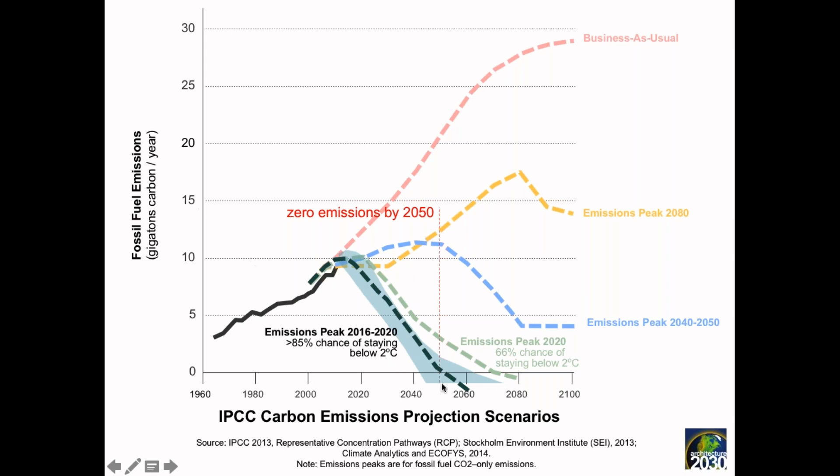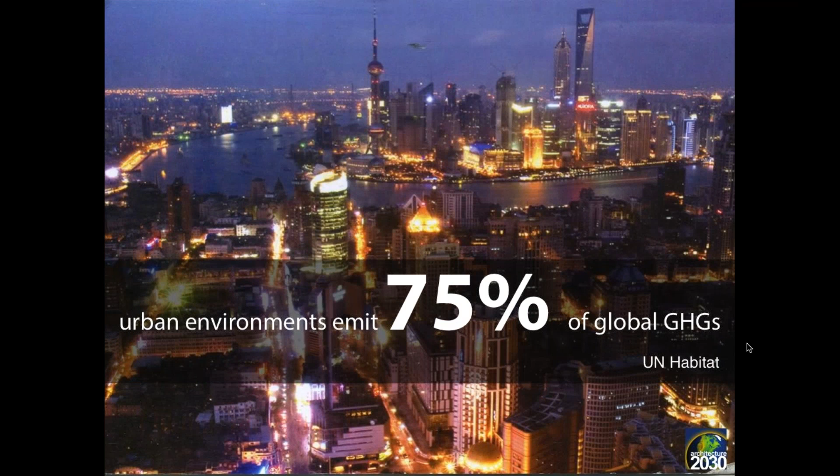Luckily, in the building sector, we have this tremendous opportunity. As most of you are probably aware, the building sector is the single largest contributor of GHGs globally, and urban environments alone represent 75% of all GHG emissions.

And really this is only to 2050 - this is expected for the ongoing future, New York City once a month. So here today, of course, we're talking about embodied carbon. It's important to look at, given those goals and given that new construction growth, what does this look like for our embodied carbon emissions?

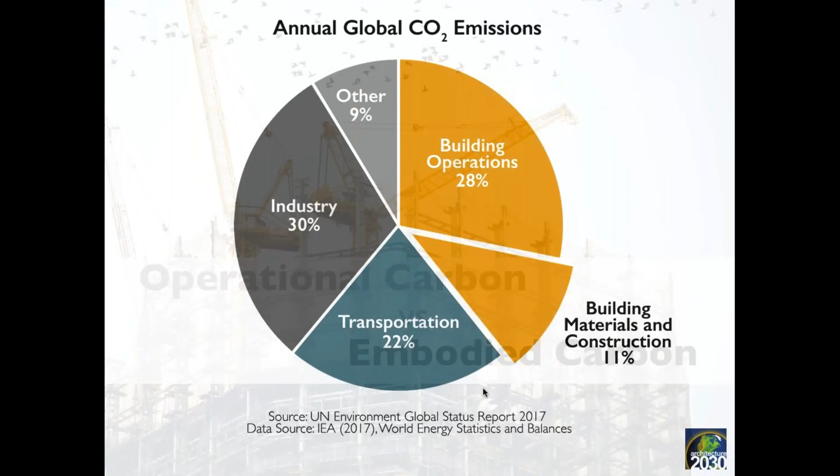On a global scale, on an annual basis, building materials and construction and building operations represent the biggest piece of the global emissions pie, with building materials and construction being responsible for about 11% of total annual global emissions.

And this pie chart is one that we've been looking at in the building sector for a while, and it shows building operations being a bigger chunk of the pie. So a lot of our efforts to date on reducing the impact of the built environment have been on building operations, and that makes sense. But our efforts to reduce building operation emissions are succeeding, not as quickly as they need to, but they are succeeding, whereas we have made almost no impact on our efforts to reduce embodied emissions.

So not on a 1-year-at-a-time basis, but for the whole life of a building, we'll zoom down to just look at one building right now. What do the impacts of embodied versus operational emissions really look like? So again, this is one building.

It's a typical high performance commercial building, an office, roughly meeting today's operational 2030 challenge target, which is a 70% reduction from baseline. So it's pretty high performance, and that comes with some associated embodied carbon penalties, primarily for a higher performance envelope.

So on day one of this building's life, which was constructed in 2015, all of the emissions emitted so far are embodied carbon, and none are operational carbon—obviously, since it's day one. The thing about embodied carbon is that once we put it into the atmosphere, it's there. So the embodied carbon stays through the life of the building.

But we don't even care so much about a 100-year lifespan of a building, because remember, we have that really crucial 2050 deadline. So what if we look at this building profile, but instead of going out 100 years, we draw the line in the sand at 2050, when we need our embodied and operational emissions globally to be zero.

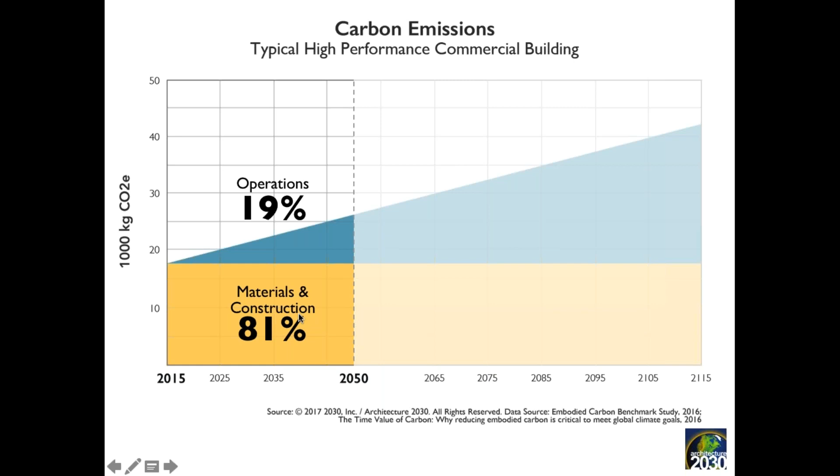So for this building, built in 2015, the breakdown becomes much different, and that materials and construction piece is significantly impactful. And of course, the closer to 2050 we construct a building, the bigger the chunk of emissions will be associated with embodied as opposed to operations.

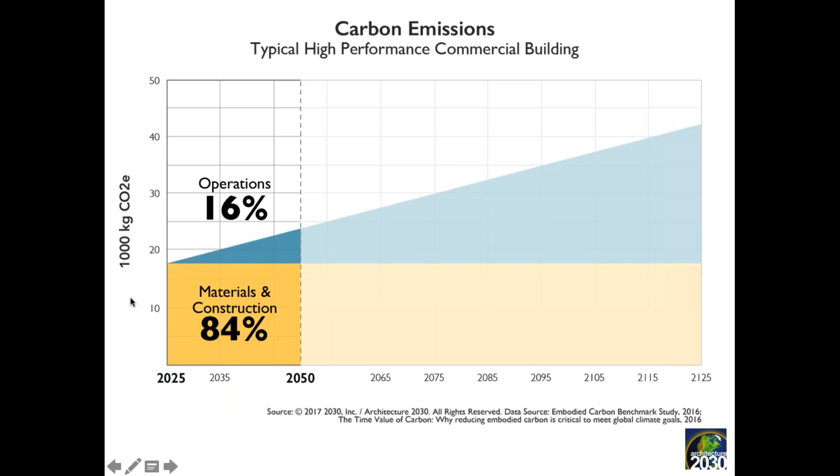So what if we zoom out for a minute from that single building scale and think back to that 2 trillion square feet of new construction that we're expected to build between 2015 and 2050? Again, assuming we draw the line in the sand at 2050, so a building built in 2049 only has 1 year's worth of building operations to show in this pie, what does that 2 trillion square feet of buildings look like in terms of emissions?

So building operations alone are 10% of the pie, which means materials and construction represent 90% of the building sector emissions of this new construction for this time period.

Now, it's important to note that this chart is, in some senses, our worst case scenario chart, but really what the chart is right now is our business as usual chart. This chart is showing that we are making progress on operational emissions reductions, which we are, but as indicative of our trend so far, we have not made a ton of progress on building material emissions.

And so the piece of the pie by the time we get to 2050 that's associated with embodied carbon is pretty significant.

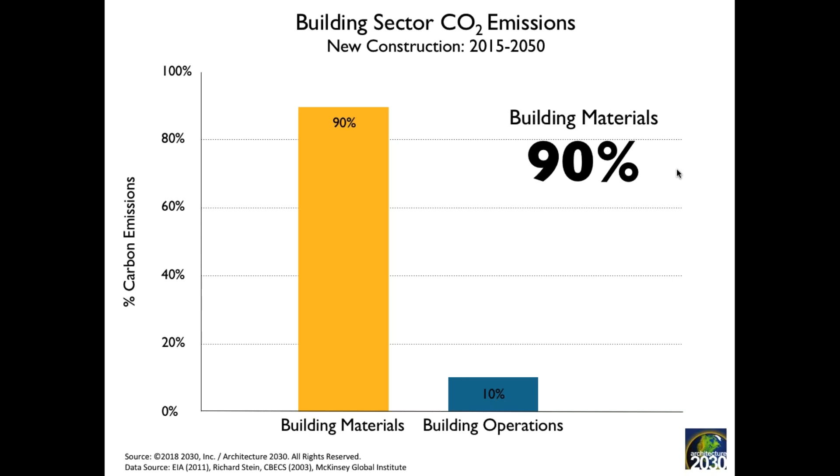So I have some key takeaways from this information that are important for us to think about as we're moving forward and looking at design. The first, just to reiterate, because this is really crucial: we have 32 years to get to zero carbon.

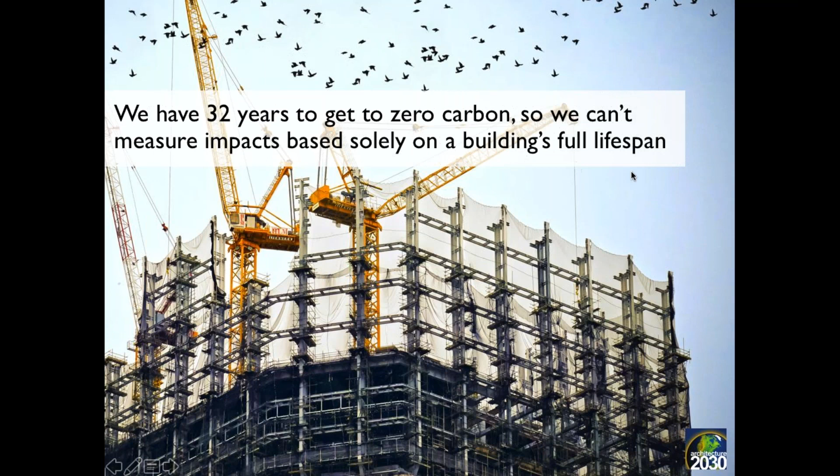So that means we can't measure impacts based solely on a building's full lifespan. When we're doing life cycle analyses, we really need to look both maybe at the building's whole lifespan, but also at what those numbers look like when we draw the line in the sand at 2050.

And then second, relatedly, when setting performance targets, it's really crucial to balance the operational savings, both goals and reality, with associated embodied carbon penalties.

So of course, in an ideal world, we are trying to design for both zero operational emissions and zero embodied carbon emissions. But the way it typically works right now, when we're trying to eke out those last few drops of operational savings, those often come with some pretty high associated embodied carbon penalties.

And it's been our mentality so far to save as much as we can with operations and just keep driving that number down, down, down.

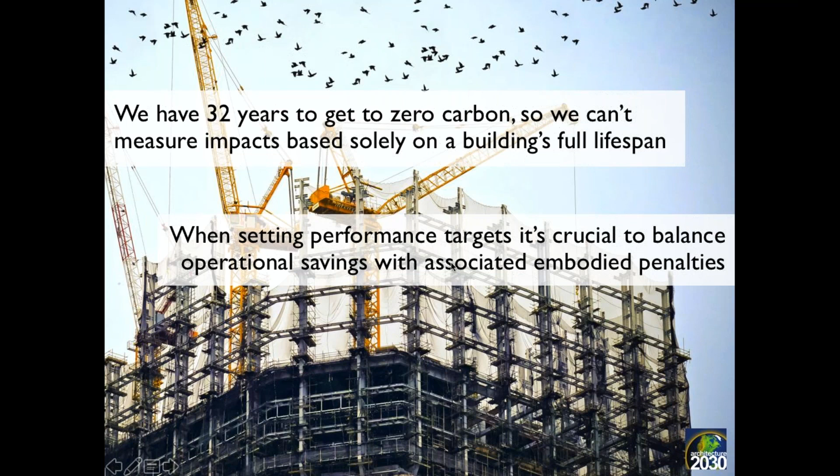But when drawing that line in the sand at 2050, it becomes more important to think: okay, is the extra embodied carbon that I'm going to emit to eke out that last 1 EUI reduction in operational savings—carbon that's going up today and will be in the atmosphere—is that really worth it?

And so to that end, I'll just do a quick introduction to this new initiative that Architecture 2030 is working on right now. It's kind of coming, and some folks on this call are even probably helping support us on this. So this is something you guys should keep your eyes out for.

We are working with the Carbon Leadership Forum on an initiative called the Carbon Smart Materials Palette. And so we're trying to address a couple of problems with this. As we know, this just pulls out the building sector pieces of that larger pie.

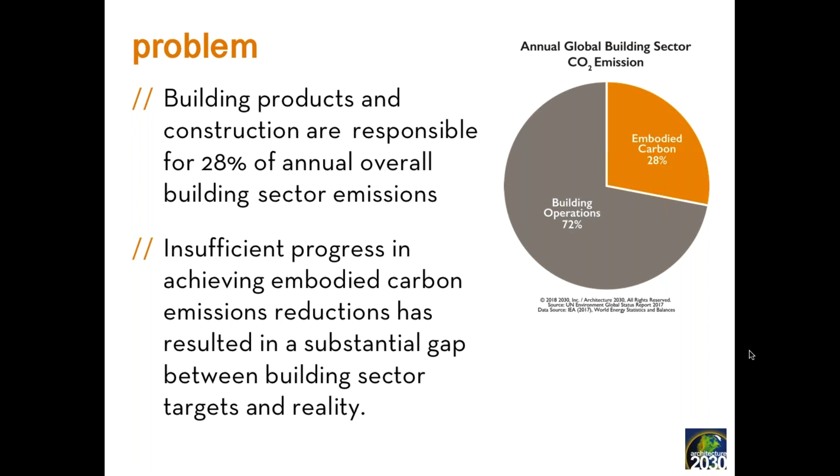When you look at just the building sector, operations right now are about 72% of annual global emissions, whereas embodied carbon is about 28%. But we have made really insufficient progress in achieving our embodied carbon emissions reductions, and that's resulted in a substantial gap in our progress towards meeting that zero by 2050 goal.

The Carbon Smart Materials Palette is intended to support immediate action for making impactful embodied carbon reductions. We do this by providing a set of attributes and design guidelines, as opposed to data-based information that you might find on an EPD. The palette will have swatches for each of the highest impact products and systems—concrete, steel, aluminum, finishes, etc.—as well as complementary swatches for naturally low and no carbon alternatives that can be used in general or in lieu of these high impact products and systems.

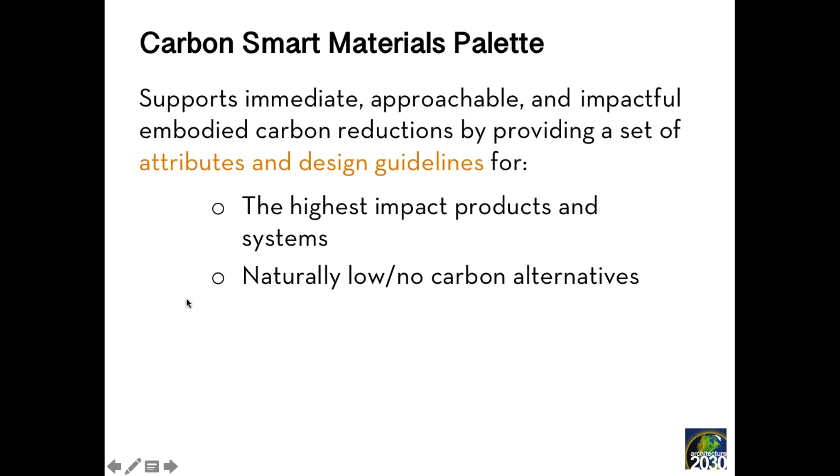This is coming, and the Carbon Smart Materials Palette will really be a whole toolkit set targeting all audiences that are going to be crucial in driving our embodied carbon emissions down to zero. The palette itself will be a free online platform, primarily for designers within the design community. The attributes will then be developed into model specifications, again for designers, but also for contractors and suppliers.

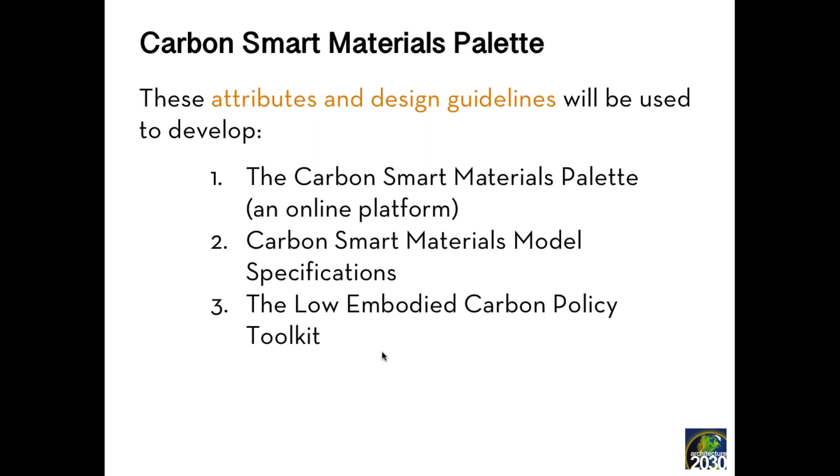Finally, the attributes in the specification language will be developed into a low embodied carbon policy toolkit to support us in our activism, and to support legislators in successfully implementing legislation such as Buy Clean Washington, Buy Clean California, and other embodied carbon bills coming down the line. So that's my quick update on what Architecture 2030 is doing.

If anyone has any questions about the palette, or any interest in participating in helping us develop those attributes and answering other questions about these materials, feel free to reach out to me. Thank you.

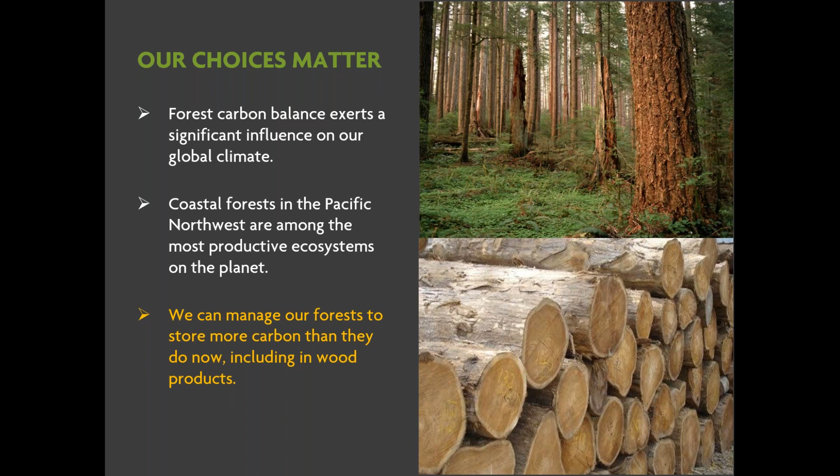So the way we originally got pulled into this was several years ago, we contributed to this study of the Bullitt Center. It sounds like some of you may already be familiar with it, so there's a little blurb for more background. We were asked to do an ecosystem service assessment of the footprint beyond carbon that went into the construction and operations of that building.

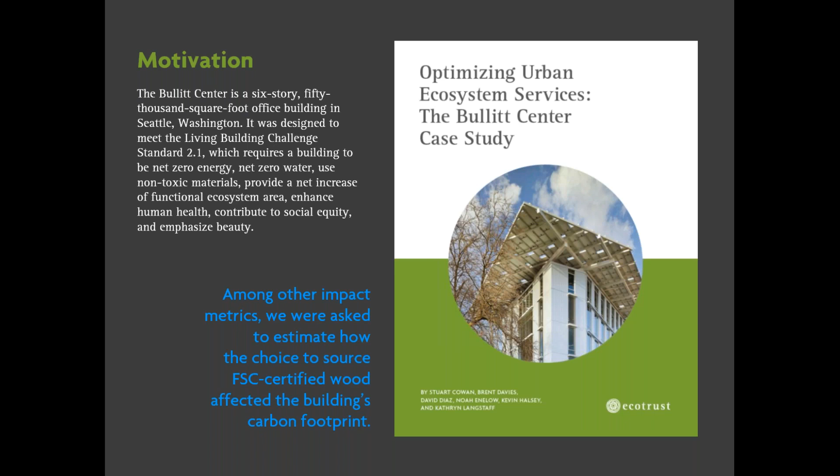One area I really focused on was that the Bullitt Center sourced its wood from FSC certified forests. We were asked to quantify what kind of difference that made in terms of the carbon benefit the building would provide. This is separate from something like wood product substitution for non-wood products. It's just about how the fact that the forest was managed to FSC specs changes the embedded carbon benefit associated with that wood, relative to buying uncertified wood.

The basic idea is that FSC represents something of a middle path between managing for timber extraction and recognizing that there are conservation values we as a society want reflected in how our forests are managed. FSC certification is one of the certification options available, and it's the only one that actually requires you to go above and beyond state regulations in terms of adopting particular management systems or conserving additional forest attributes.

So we developed a study focused on two key requirements for FSC certification. One is green tree retention, which refers to how many trees you leave whenever you do a harvest. The other is riparian management zones, or how intensely you can manage next to streams. Usually those practices are restricted by states with Forest Practice Act regulations, to prevent sediment from getting into streams, protect fish habitat, and protect drinking water supplies. FSC requires management to go above and beyond state regulations in both categories.

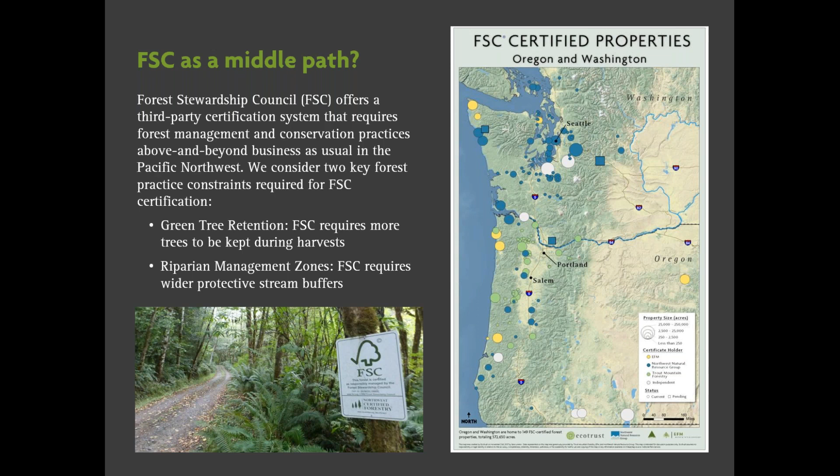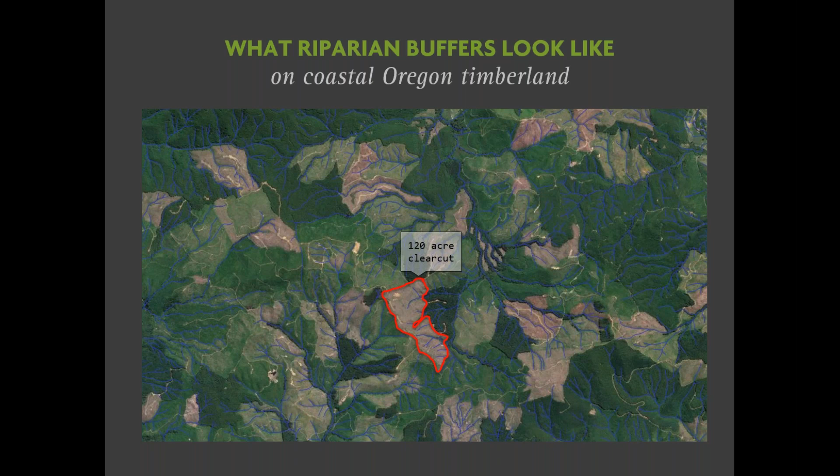I'll give you a sense of what some of these look like on the ground. This is an overhead view of a coastal Oregon watershed that's been pretty intensively managed. For scale, you've got this 120-acre clear cut implemented over the past several years, and you can see some of the streams across the landscape. This shows the regulatory stream buffers that would be implemented under Oregon state law. You can see it changes depending on the type of stream - on the main stem here we have wider stream buffers than elsewhere.

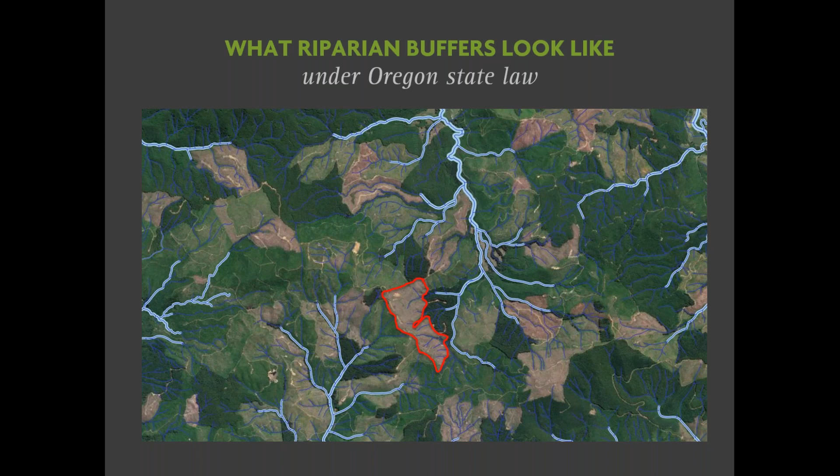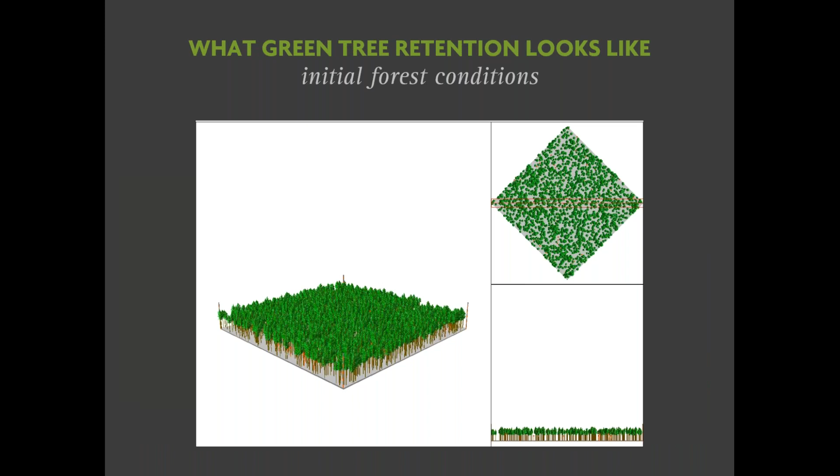The other aspect we're looking at is green tree retention. If we start with a forest that looks like this, there's a few different ways you could implement a harvest. On the left, this is showing a 10-acre area and what it would look like if you were harvesting under forest practice rules - this requires you to retain 4 trees per acre, actually 2 standing trees and 2 downed trees. We're trying to be a bit more conservative here, assuming more conservation than is likely to actually be happening under state forest practices.

But under FSC, the most intense harvest you can get is this 10% - you have to leave at least 10% of the basal area, which is the cross section of the trees across the landscape, retained in a harvest. So in general within FSC, we would expect landowners, if they are implementing harvest, to range between this 10% and 30%.

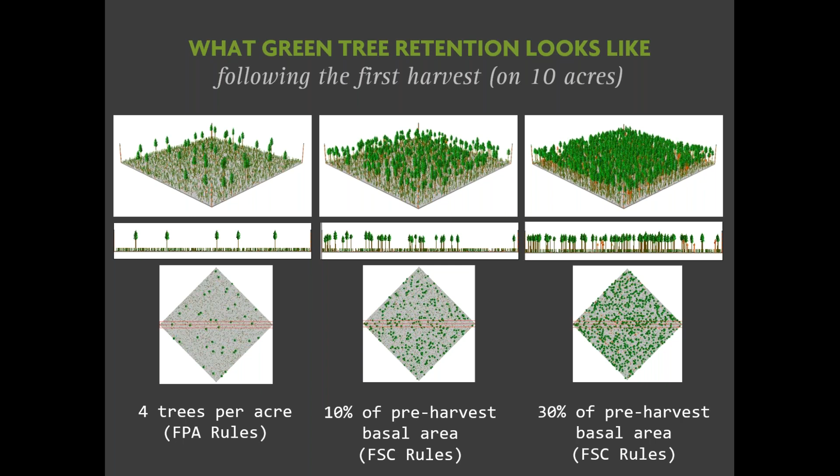And as you can see, it's a lot more trees that you're leaving behind. So we wanted to evaluate what that impact would look like over time. We selected a bunch of different properties all across Western Oregon and Washington.

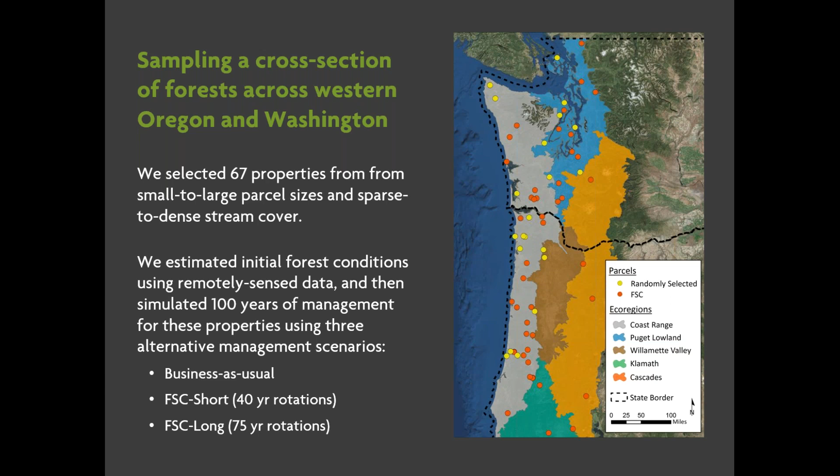We selected them intentionally to try to cover large properties and small properties, properties with lots of stream cover and no stream cover. Then we simulate 100 years of management, and we do 3 different scenarios: one that's business as usual, which is a short rotation of about 40 years with minimum retention requirements and minimum riparian buffers under state law. Then we simulate 2 FSC type scenarios where we're going to be following the green tree retention and riparian protections that FSC requires.

This is a glimpse of a paper we're preparing to submit for peer review at the end of this month. Some of these numbers are still in flux, but one key takeaway was that when we look at tree carbon, leaving more trees on the landscape gives you this step function over time, where under business as usual, the amount of carbon stays flat, but under FSC, you start stepping up over time.

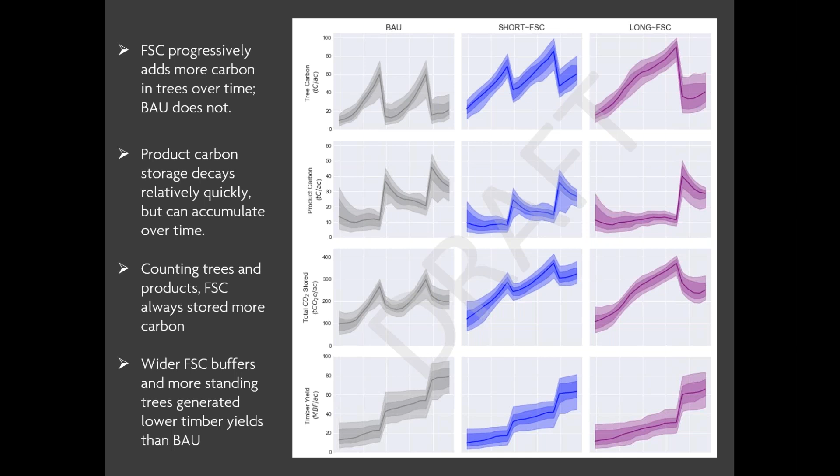Carbon storage in products decays after it's harvested, so that's a really important aspect of carbon accounting in forest management - you recognize that wood products carbon is not a permanent sink. We generally found that FSC always stored more carbon than business as usual did, and there's a trade-off with how much timber you're pulling off the landscape as well.

So when we try to boil that down into what's the embedded carbon number - if you were to buy 1,000 board feet of logs from an FSC certified forest, what's the difference in terms of how much carbon is stored there? For what it's worth, we're trying to make very conservative assumptions that err on the side of assuming there's more conservation under business as usual than is likely to be the case. So these numbers are intended to be the minimum estimate of the FSC carbon benefit.

What we found was that per 1,000 board feet of logs, the numbers were different in Oregon versus Washington. Washington has a variety of stricter forest conservation practices than Oregon does. So adopting FSC in Oregon would correspond to about a 1.9 ton CO2 difference per 1,000 board feet of logs bought from an FSC forest versus business as usual. In Washington it's a little bit lower, but both are substantial improvements over business as usual in terms of how much carbon is embedded in the wood you're buying.

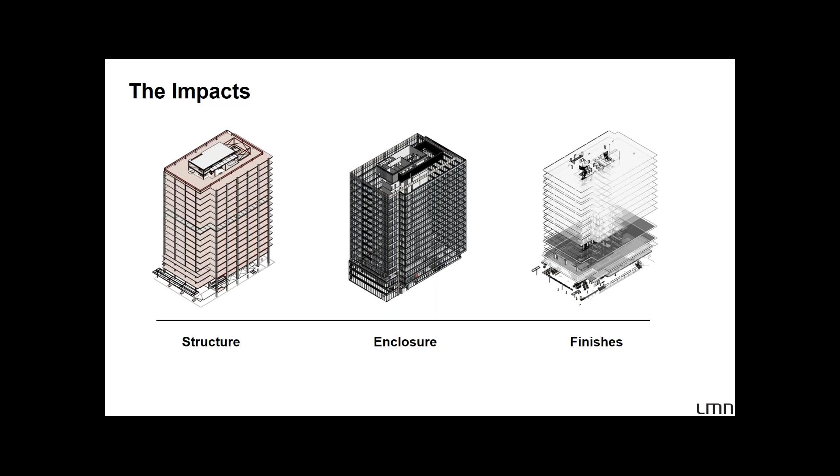So typically, what you'll find for embodied carbon is that the structure is almost always the biggest impact. Enclosure usually follows behind that, and then typically finishes behind enclosure. So there's sort of this downward trend.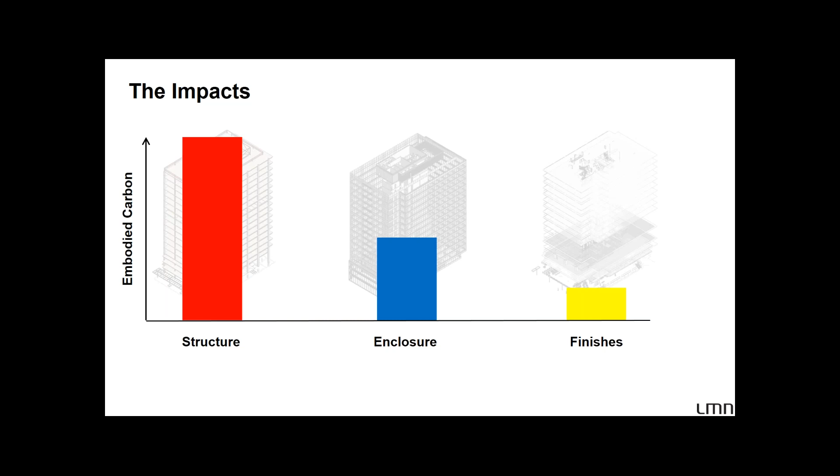So certainly the most important thing that architects, engineers, designers could focus on would be the structure. However, there's a really unique opportunity for architects in particular to focus on the enclosure because it's just really easy for us to do, and we design enclosures and facades all the time, and it oftentimes does not have a lot of cross-discipline coordination, or it's something that's mostly in the architect's hands to do.

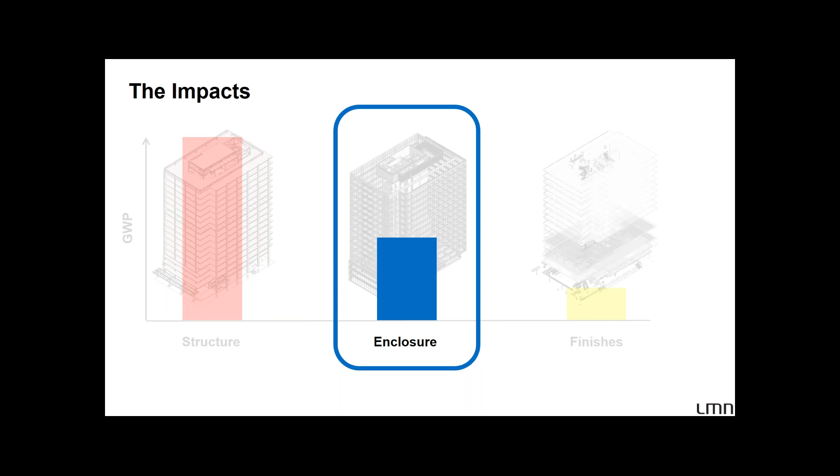So it's a huge opportunity to take that relatively high impact of the full building and try to make some reductions on it. So again, it's something that architects do every day.

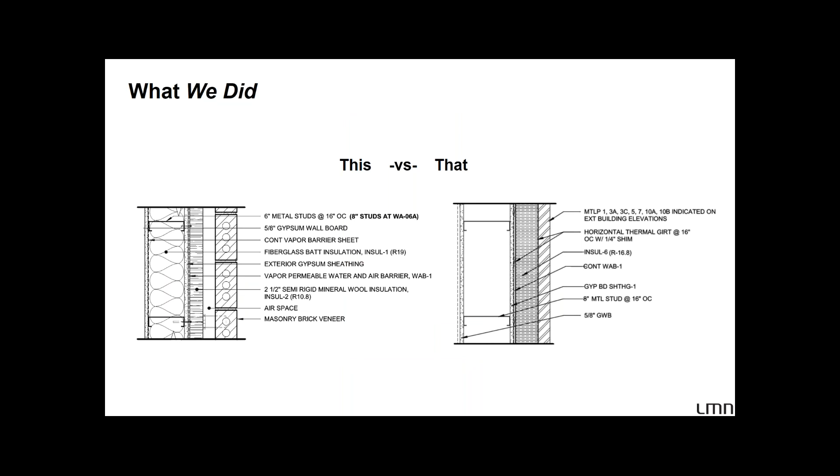It's this versus that. What are we going to clad this with? How are we going to insulate it? What's going to be the framing? And for each of these different materials, trying to develop an LCA sort of intuition as you're designing and making decisions like this as an architect, so that you can make less impactful buildings in the future.

So what we did, again, this was one of the first sort of studies we did a while back, just to kind of get a sampling of some of the stuff that we've already done. So we took 10 of our projects. Some of them were built, or under construction, or under design.

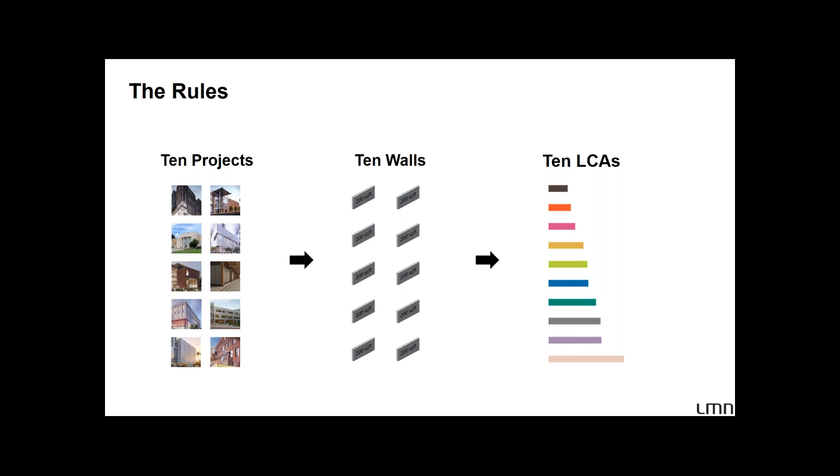We took a single wall type from each of those, an opaque wall, and just said let's compare those and see where they stand. Let's just do a benchmark and see how those different walls compare against each other. And like I said, there were a lot of different types, different geographic regions, different functions.

But the important thing was that we were doing our own buildings and making it relevant to our own firm. This information that we were looking at was going to be able to be brought back to those teams to try to make a sort of an office-wide understanding of embodied carbon.

One thing we had to look at was, well, what are we going to measure? Typically the TRACI impacts, and specifically the ones used for LEED V4, were what we chose to record for this study. And then, how are we actually going to compare these?

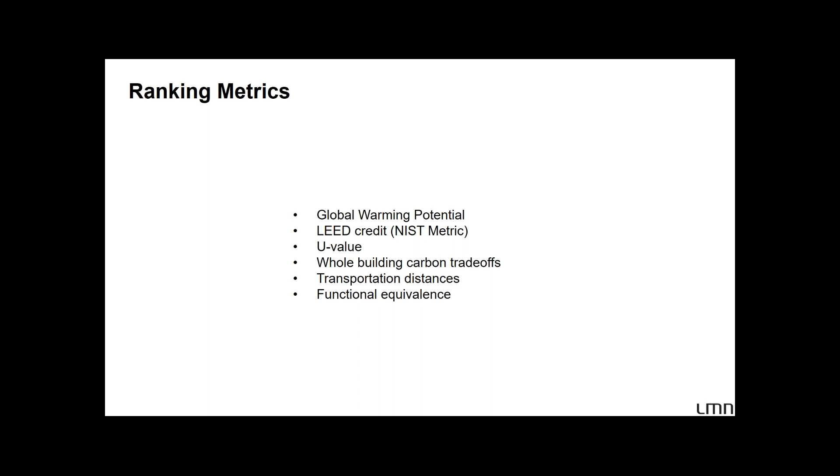So there's a lot of different ways we could do that, and I guess I won't get into all of them, but the point here is that we chose to just eliminate the scoring, or sort of the ranking or comparison of these, and just look at the embodied carbon. We're still going to measure everything else, but for this one study, let's at least compare them in one consistent way and eliminate the variables to make it as straightforward as possible.

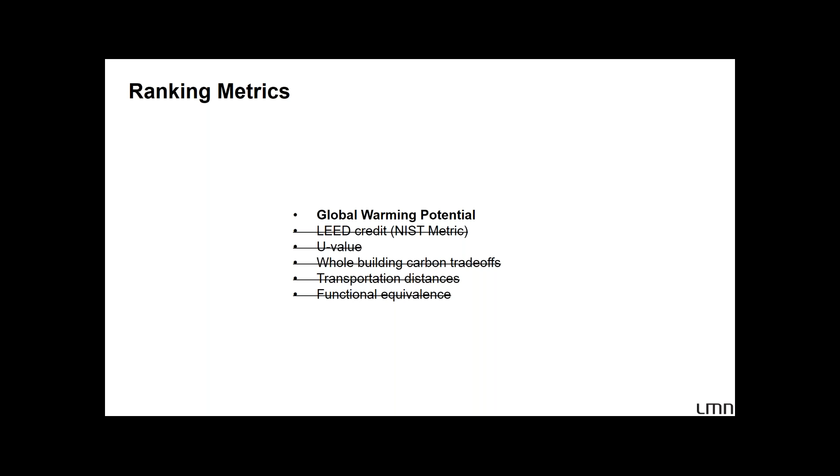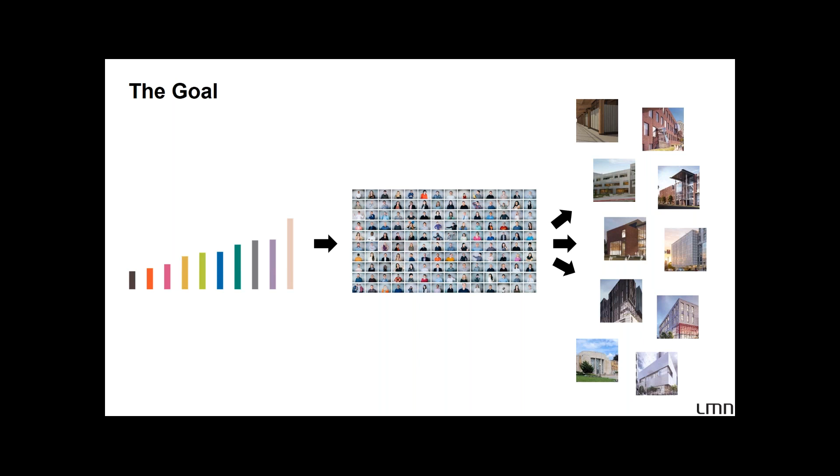So again, the goal: we'll get that information, we'll give it back to our like 150, 160 employees, and hopefully that can create a culture of bringing that sort of design intuition back into the projects, or back into the wall assemblies that you're designing next time.

I would like to call it sort of a playfully competitive approach, so that when people saw their own projects, they were like, oh, why is our project so much worse than somebody else's? It wasn't meant to shame anybody for having a high embodied carbon wall. There's a lot of reasons that go into making the choices for a wall type or an assembly. And like I said, typically embodied carbon isn't very high on that list. There's structural concerns, there's thermal concerns, there's all sorts of things that would dictate what type of assembly you create.

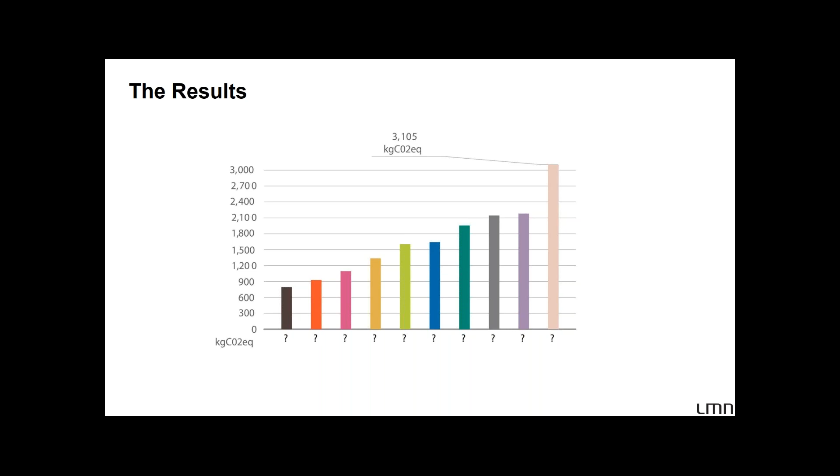But adding this as one of those layers for a designer to start thinking about was the goal here. And this is what we ended up with, sort of scorecards for each individual project. A typical one looks like this. This is one of the highest ones.

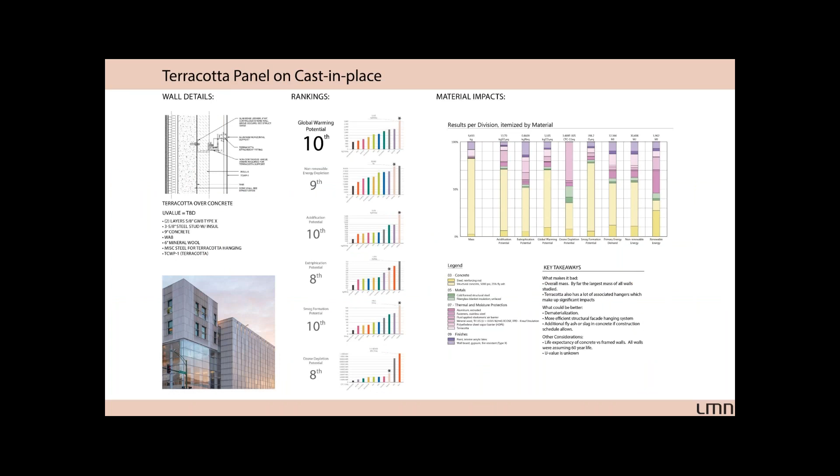So the important things here are providing the wall detail, just saying what's in it, what they used, giving it the overall rank for embodied carbon, and the impacts by material in the top right. So we could say this particular wall had a lot of cast-in-place concrete, that was the yellow in that diagram.

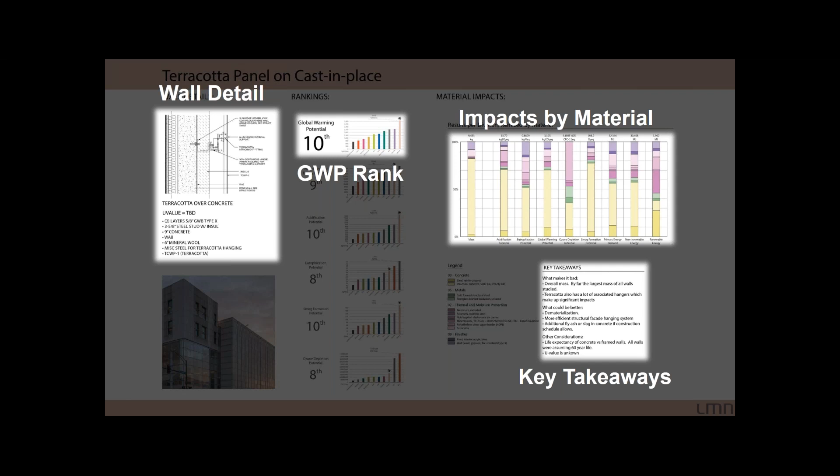So from there, we could make some very easy key takeaways in the bottom right, so that if somebody gets confused by the data or the wall detail or any of the acronyms for all the different things, they could at least just take some rules of thumb, so they could still make these sort of decisions next time around.

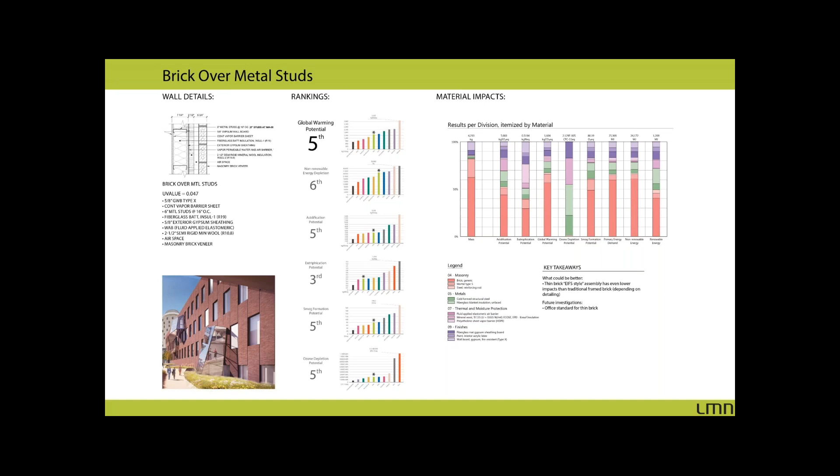I'll skip through most of these, but this one landed somewhere in the middle, a typical brick facade that we usually do. And the least embodied carbon was actually some upgrades we were making to an existing stone wall.

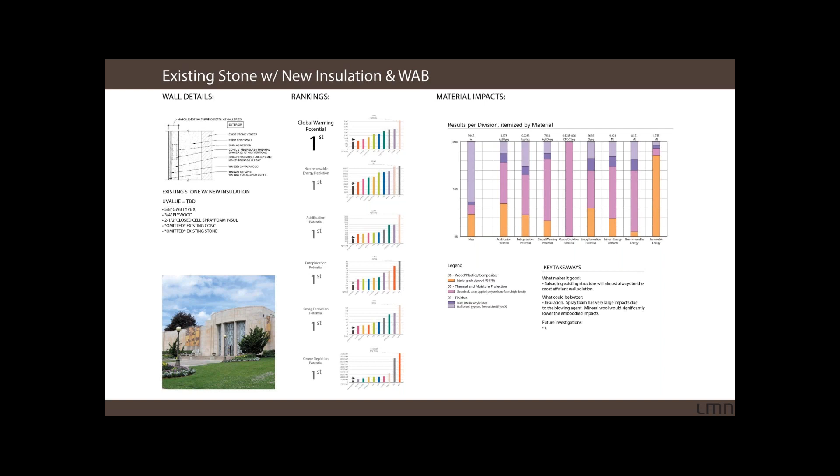There were lessons learned in all of them, but when you compare these as a whole, it was clear these are not apples to apples. These walls are doing different things in different parts of the country. So what we found interesting was, let's at least look at some that are similar.

We do a lot of university projects, so we end up doing a lot of masonry walls. And 4 different ways that could have been done were sprinkled in throughout this evaluation of 10 walls.

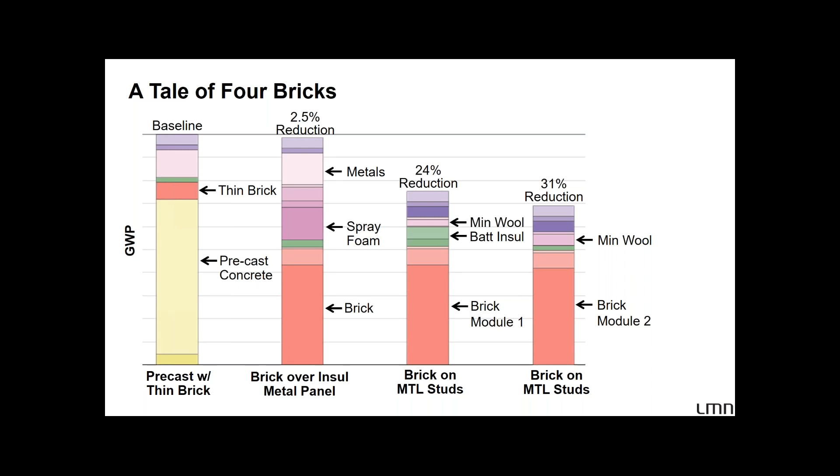But at the end of the day, we're looking at this thinking, what could we actually do to go further? The brick is kind of the constant you just can't really get rid of. So we took a step back and said, the thin brick - but what if we use that on a different type of assembly?

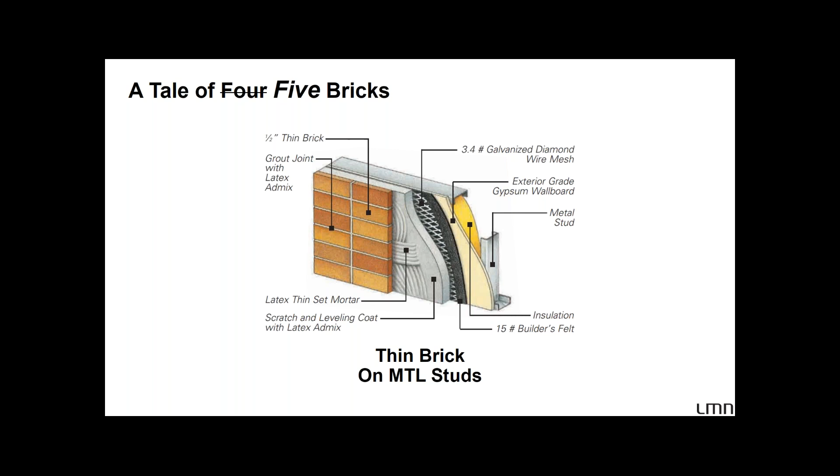There's a lot of options out there, but let's just evaluate one, because it's not a typical assembly we'd spec, but we had the assumption it would probably be a pretty big reduction from business as usual. And we were right, it was quite a significant reduction.

So this is meant to be a lesson learned: architects have the ability to do most of this stuff and just do it. You don't need to - a lot of it doesn't cost more money or more time. It's just an opportunity to really drill down at the material level and start making more informed decisions.

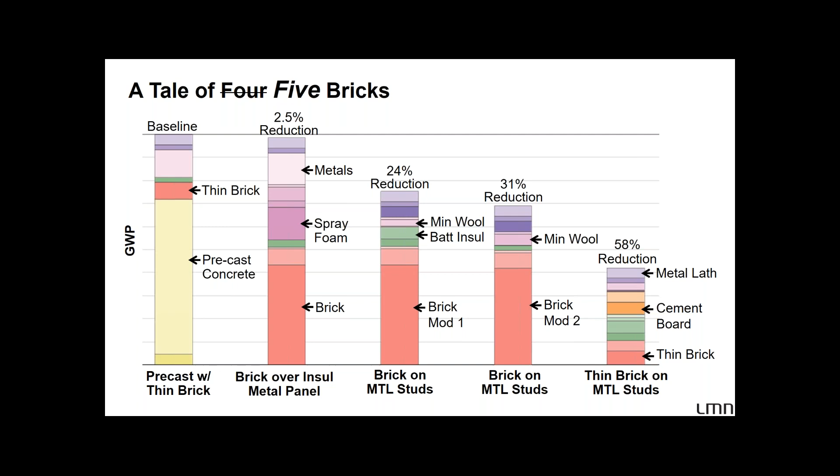So a couple takeaways - this was quite a while ago now that we did this study - but a couple takeaways, because I know it's really confusing to start getting into doing LCA.

My advice would be to start small and set some rules. I would highly recommend not trying to just do a whole building LCA and try to get LEED credits for it or whatever it is you're trying to do, because I think you'll get lost in the details and probably make a lot of mistakes. So start small - pick 2 curtain walls or 3 different concrete mixes, but set some rules and eliminate variables to make it easy on yourself.

Number 2 would be to forget perfection.

When I shared this study with our firm, a lot of people said, 'oh, we didn't actually use that water-air barrier.' And it's like, okay, but that's going to be a very small amount. You've got to focus on the big picture. That's true for data as well. You might be uncertain about the data you're using, whatever software or database, but there's still a lot of progress that can be made with what's available.

I would highly advocate for going down that route. Number 3 is make it relevant to your firm, evaluate stuff that you use. Pick things you're doing all the time, so everyone in your firm will invest in it and relate to it. When I brought that study back to the team, it was way more impactful for people to see theirs compared to somebody else's, and know exactly what they did on that project, and see how a different project might have done it differently to have less embodied carbon.

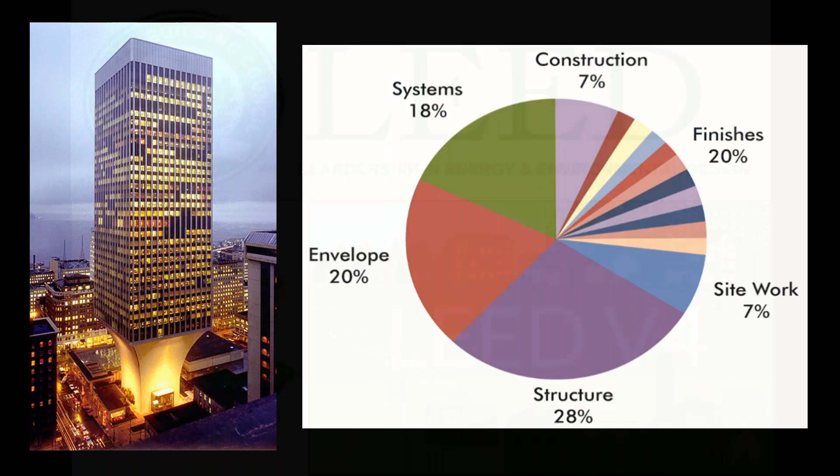I think these LCA specs are important, whether you're pursuing LEED version 4 credits or your project just has sustainable goals. We have tools we use in design, right, Tally—I'm sure some of you are familiar with these—and Athena. A lot of times Tally is nice because it plugs right into Revit, but there are multiple tools. That's only part of the story though.

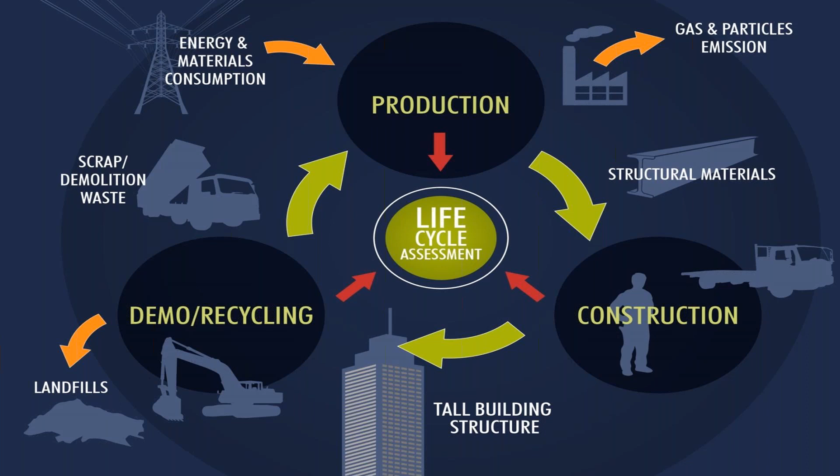To truly get an accurate LCA at the end of a job, we need to tap into the knowledge of the contractor. We need to know where the materials were produced, how far they came from, how they were constructed, how much waste was involved. In our structural drawings we show sticks of rebar, but there could be waste we don't understand, and even potentially end-of-life results—what happens to those materials after the life of the building. So we need to tap into the contractor's knowledge, because contractors know the actual material quantities, where they're procured, and how they're constructed.

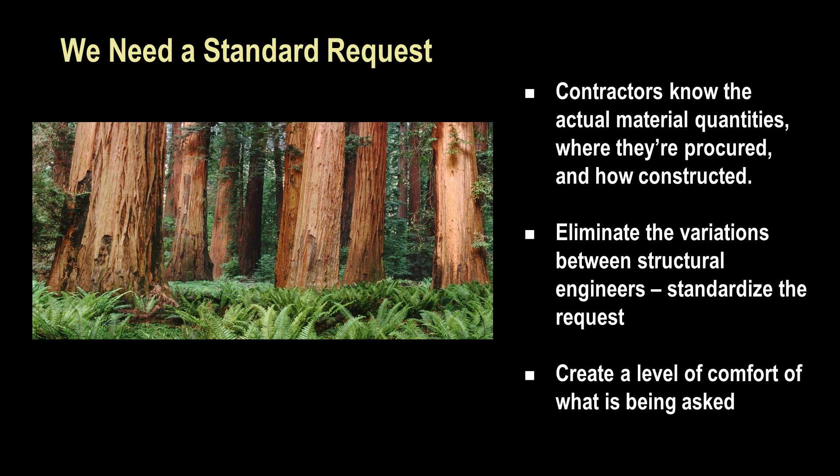So the specs should look the same, whether they're from MKA, Thornton Tomasetti, or Walter P Moore, so that we create a level of comfort about what's being asked. That's how we feel we can change the industry—if contractors are used to seeing the same thing requested project to project, as opposed to different ways depending on the structural engineer or the project.

Obviously, I'm not going to walk through our specs because that would be extremely boring. I'm going to highlight what we've been doing the past year or so.

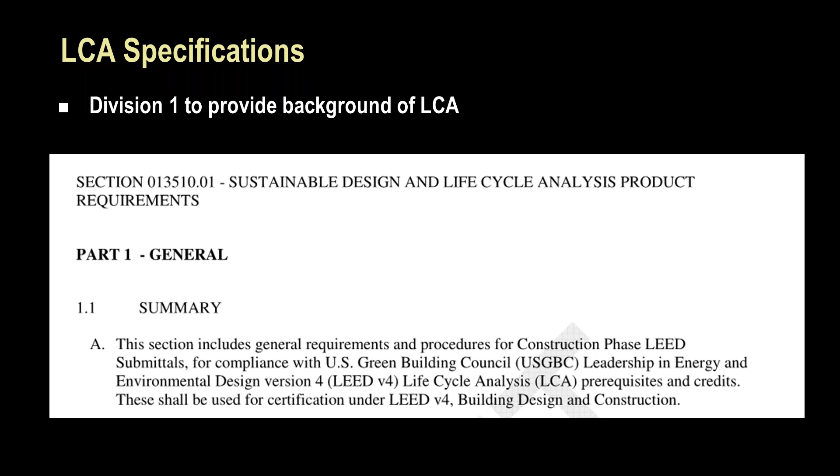We've produced a Division 1 section to provide background on LCA, titled Sustainable Design and Life Cycle Analysis Product Requirements. Some people have used these and taken snippets to put into other portions of their specs. But the idea is to have a standalone section giving the background for LEED version 4 and other sustainable goals and LCA in general, serving as a foundation for the material-specific sections we created.

So you have your cast-in-place concrete, timber, steel, masonry, etc. We've added language you can insert into those sections. For example, the cast-in-place concrete section has a whole portion on environmental product declarations. We've also tried to move away from industry-standard EPDs—we want to create a change where supplier-specific EPDs become the norm, and it's written to try to incentivize that during the bid process.

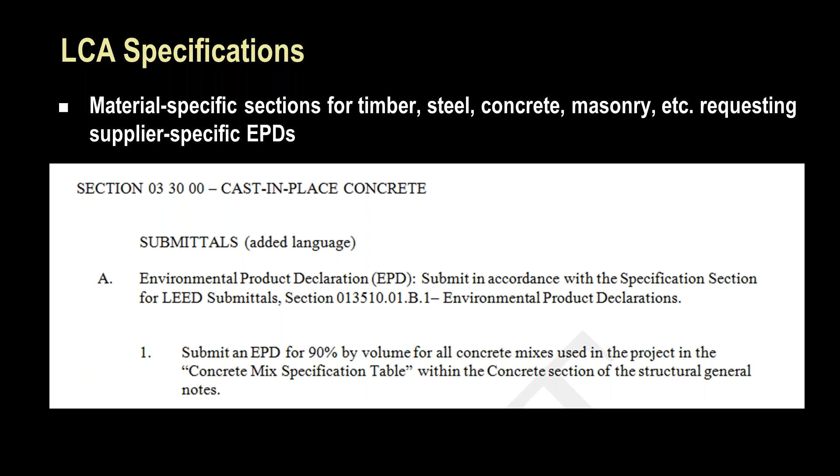Also very important in these material-specific sections is quantity reporting. We want to ask for all the quantities and where each material was obtained. For example, from the reinforcing section, the total mild reinforcing weight, which could even be broken down into different parts of the building.

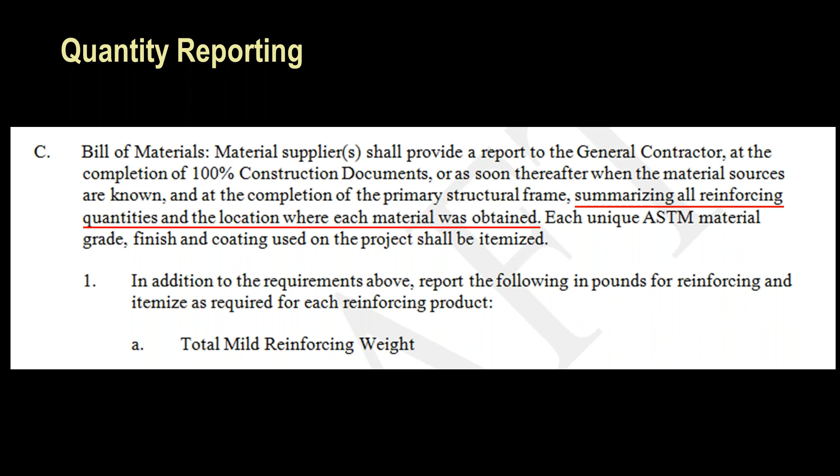We've had some feedback that this could generate a cost uptick, but we don't know for sure until we start getting these out there. And of course there's a learning curve—as this becomes more normal in the industry, maybe the cost impact will be less. But the key is that these specs need to actually be used, and we want feedback so we can continually improve them.

What's great about the timing of this webinar is that today we just finished version 2 of the specs. We've had a bunch of really intelligent feedback from folks around the industry, some who have used it and some who haven't but are very knowledgeable. We've tried to scrub the originals, and those will be up on the Carbon Leadership website soon. If you go to the University of Washington Carbon Leadership Forum, under the initiatives, you can download these specs and provide feedback. That's the idea—we want these to actually be used, and that's how we're going to generate change. It's a continued process: we look for feedback and continue to evolve and improve them.

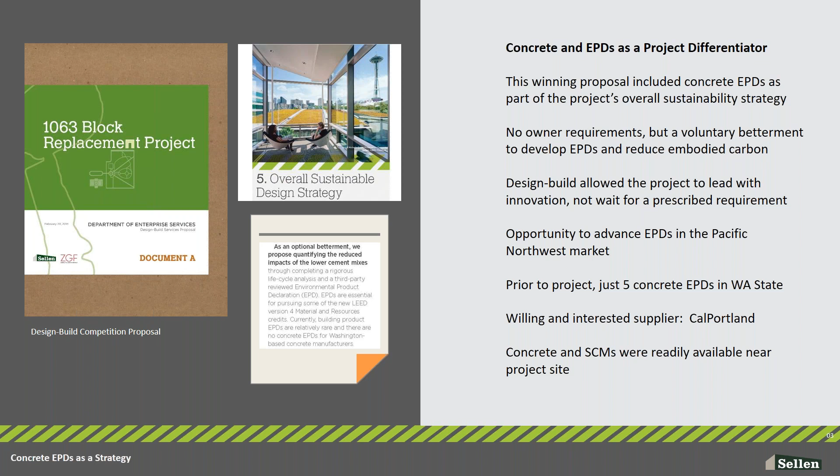The other thing is we saw that this project could be pivotal in changing the market here in Washington State. There were just 5 EPDs for mixes produced in Washington State prior to this project, so we thought this would be a great opportunity to change that. We also had a willing and ready supplier in CalPortland to partner with us.

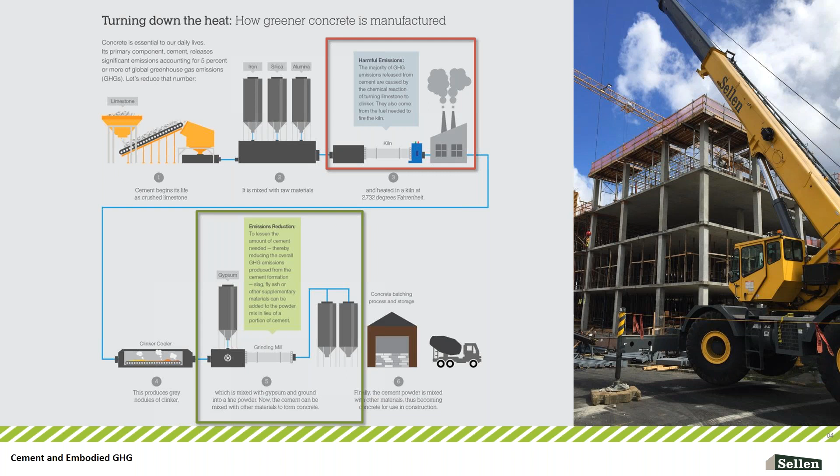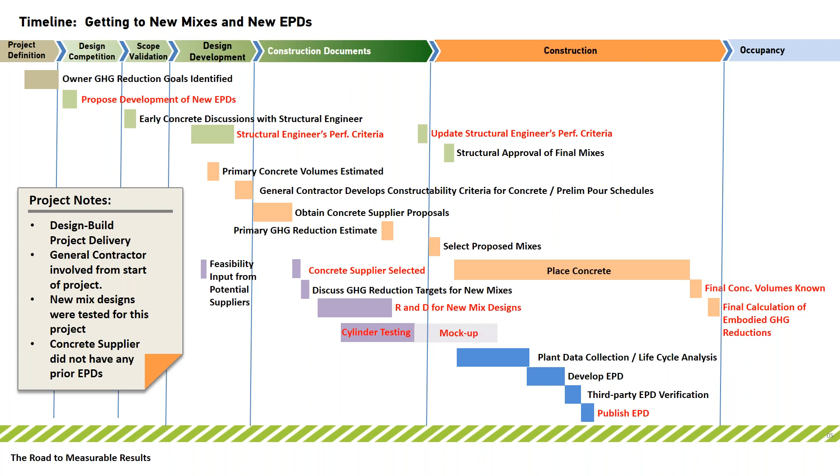The purple bars are the concrete supplier, and you can see that their involvement, at least in this project, started back in DD, which is great. Earlier the better, because they need all the time they can get to do their R&D, their cylinder testing, things like that. And then lastly, the blue bars at the bottom, that was the EPD development and the work of the LCA practitioner. So just to highlight a few key moments in all of this.

As with everything, start early, but start early because there's going to be likely a schedule and a budget implication. So that needs to be accommodated while the schedule and the budget are still in formation.

Talking to your structural engineer early on, as early as possible, and seeing if, at least for some of the mixes, there could be a change in the maturity dates from maybe a more traditional 28 days to 56 days. The selection of a concrete supplier early on, again, allows them to have that time to do their R&D.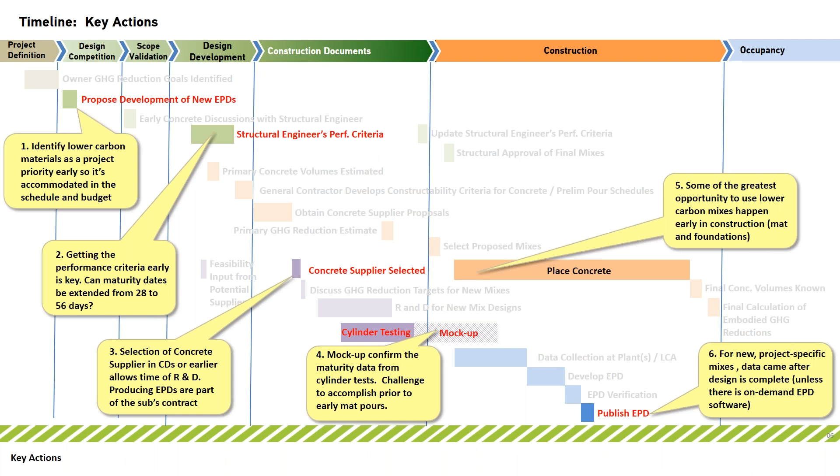And then finally, you can see that we were going through this process for the first time, so there were no previous EPDs with this manufacturer, at least at these plants. And so by the time we actually published, that was well into construction. So obviously too late to inform the design decisions of this project, but that gives us the information to be smarter with the next projects now that we have the data.

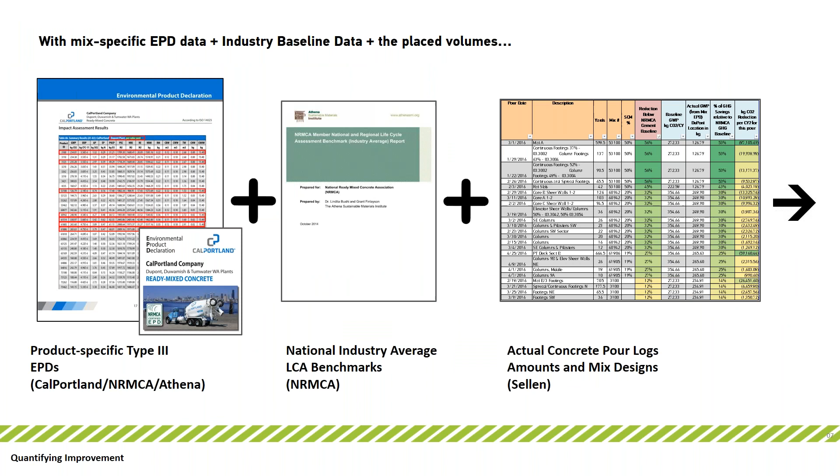So with those project-specific EPDs and the national baseline and our pour logs, we could basically do the math, and this is how it came out for a specific mix. The maximum reduction per the baseline was 58%. For all of the concrete used on the job, there was a 31% reduction based on national baseline. And then if you were comparing it among similar mixes in the Pacific Northwest, it was a 27% reduction. The total amount of concrete placed was just over 12,000 yards, or 9,200 cubic meters.

So not a humongous job, but a sizable job. Most of it, as I mentioned before, was the post-tension deck. And what we learned from that is that schedule drives everything. The need for it to cure, to hit that initial strength so we can move our forms, is key. That in turn really limits how aggressive we can get in taking the cement out, because that in turn retards in many cases getting that initial strength.

So we had about a 1,400 metric ton reduction of GHG over business as usual. Again, probably with a different structural system we could have been a little bit more aggressive with that, but that's the result using the PT decks.

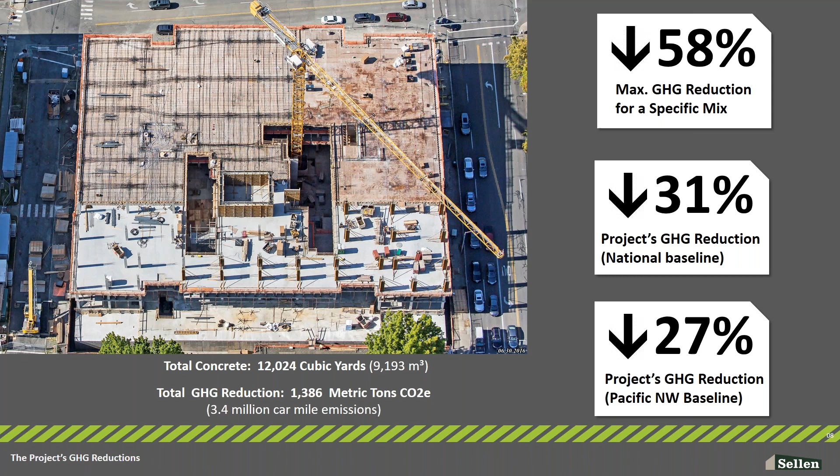I think the bigger story here is that we started out in the state with 5 EPDs, and after this project we had 95. And that's because the requirement to produce EPDs was written as one of the contract requirements as we brought on our subcontractor, and they did a great job of really moving the market forward and giving us great coverage and data on the project. So by volume, 99.7% of the project's concrete had EPD data. That really gave us good confidence that when we ran the numbers, we had good data behind it.

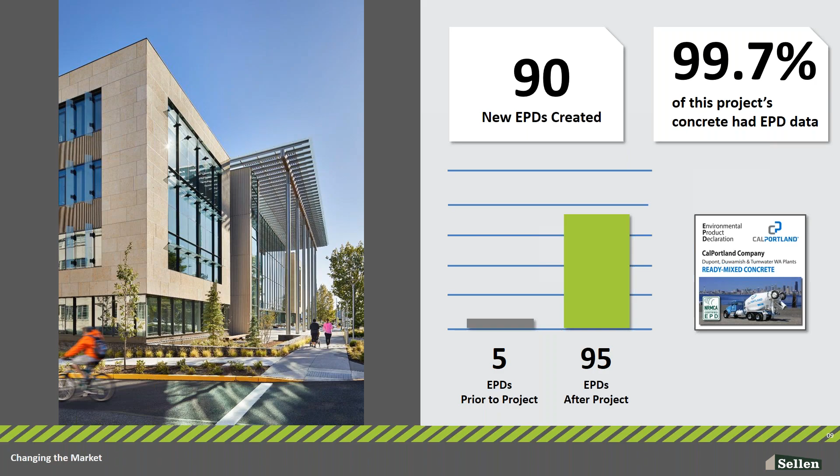So just in summary and to a few takeaways - I mentioned this before but I can't stress it enough - really be aware of the schedule impacts. The schedule impacts come in a couple different categories. One is that R&D and producing the EPDs, that's obviously additional time you need to accommodate within the schedule, and to bring on the partners earlier so that happens.

The other schedule impact is that often when you are taking cement and reducing GHG from a particular mix, it will achieve that initial strength later than maybe a conventional mix would. And so that really causes you to think long and hard about what are the best applications, and what is not on the schedule critical path that would be a good match for those more aggressive mixes.

Mock-ups - big lesson learned there. We hit our strength on everything, but again, it behaves very differently if you're testing the initial strength in the lab versus out on site. Weather and schedule - we had the wettest winter on record when we were building this, and one of the coldest. And that, just in general, concrete aside, gave us some schedule challenges.

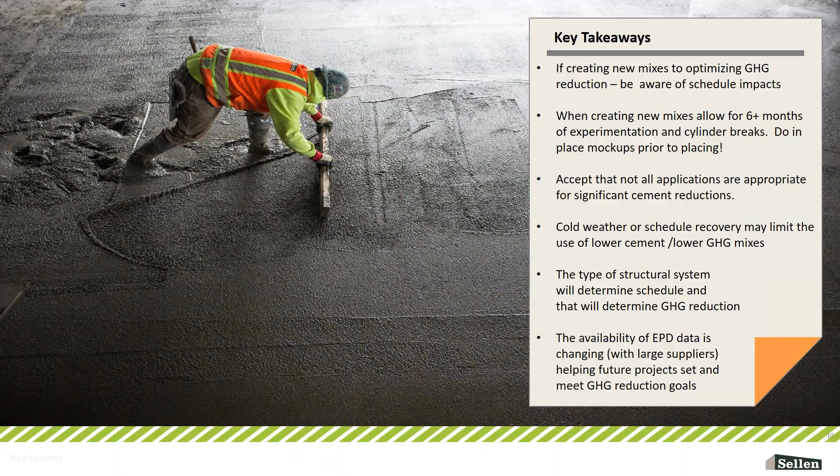So this is all great news for all of us on the call who are looking for and wanting the data to proactively plan how we can take embodied greenhouse gases out of our projects and be smarter about our next projects. So thanks very much, and I look forward to questions from you guys.

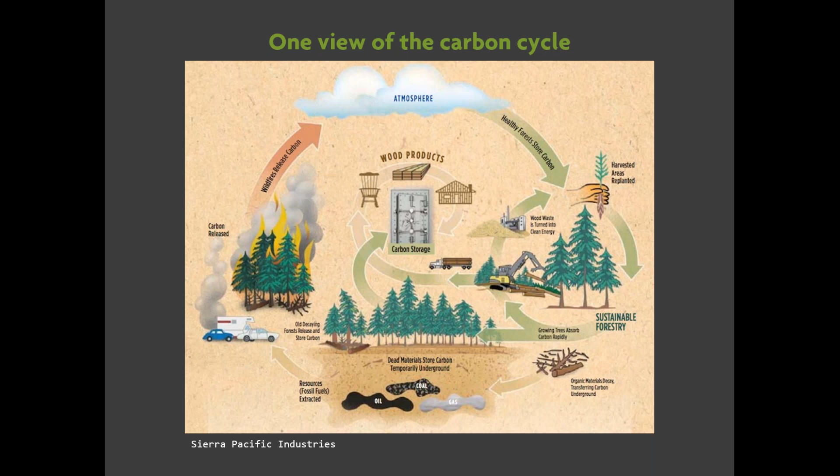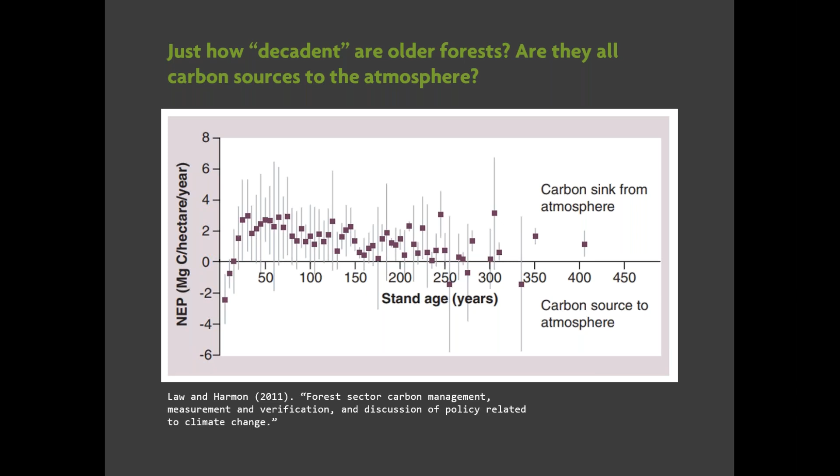A couple of them are that this is showing the carbon balance of a forest over time, and we have this idea from that previous image that once forests get really old, they're releasing carbon to the atmosphere. What we find is that's generally not the case. Younger forests do sequester carbon at a quick rate, but forests that are 100, 200, 300 years old are stockpiling a huge amount of carbon and holding onto it for a very long time. So what you want is to maximize carbon across the whole forest system, that's products and in the forest.

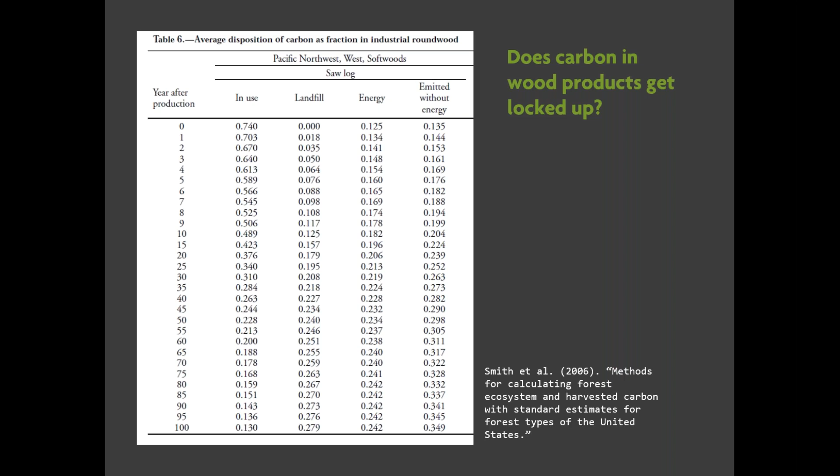The other piece is, does the carbon in wood products actually get locked up? This is what happens after a harvest in terms of carbon proportion and different uses. In year one, you've got maybe 74% of carbon harvested in products that actually goes into products, and the rest is emitted. By year 100, you've only got 13% of the carbon that went into the product remaining. Accounting for these two things gives a very different picture. Here's a different version of the carbon cycle from a peer-reviewed study, where the wood product sink looks very different than in that previous story, and you've got decomposition happening from all forest types, with fire not being where most of the emissions come from.

Dialing those things in makes a very big difference in terms of what conclusion you'd draw. In general, most of the recommendation from the scientific community is that storing carbon in the forest is the least leaky bucket. Trying to store carbon in wood products punches a lot more holes in the leaky bucket, and it's harder to accumulate carbon over time.

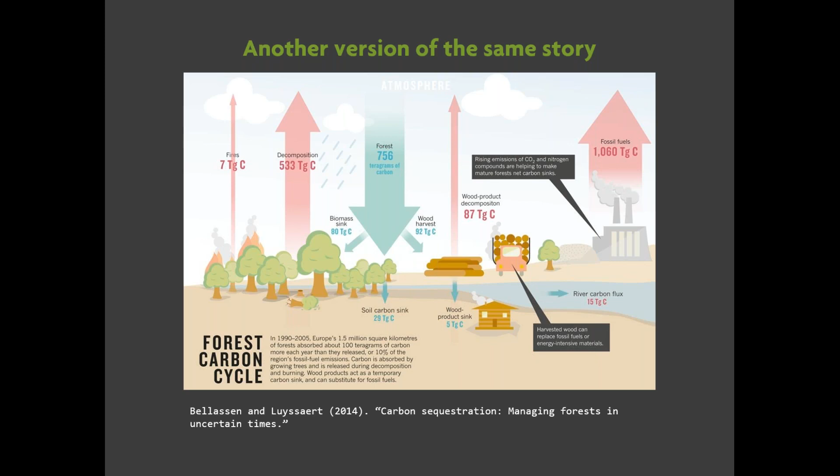Okay, this question is for Dave Walsh. Dave, how do you think lower carbon concrete affects costs? Would this negatively impact someone's construction budget?

There's a couple ways to answer that. We were looking very closely at cost. The cost of cement and the cost of the SCM, like slag, that might be replacing the cement, they're commodities, they go up and down. But at the point we were bidding this project, the cost of the SCM was lower than the cement, so logically you'd think replacing some of that would have a beneficial impact on cost. Of the people bidding and most familiar with this, we had a very competitive bid, actually the most competitive bid was the mixes that were most aggressive in terms of reducing the GHG.

So from the material cost side of things, I don't think it needs to be an add. In some ways, it might actually be a cost benefit. But there's a schedule component to cost as well. If you have some of the more aggressive mixes on your critical construction path schedule, that can stretch out your schedule, and that's a big cost implication. So I think the key to making it cost neutral or cost beneficial is to keep those out of the critical path, so you're not negating any lower material costs with extended construction durations.